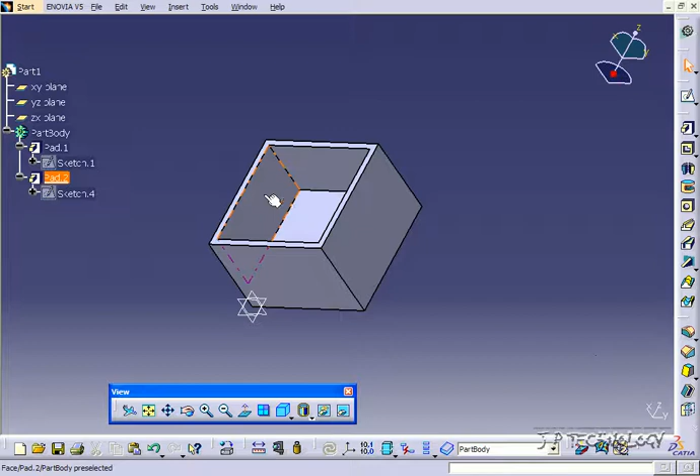To use the stiffener, all you need is one profile, or one open line, and from that you're able to make a stiffener. So what we're going to do is create a line along here and extrude it across. To start off, let's click this face and click Sketch.

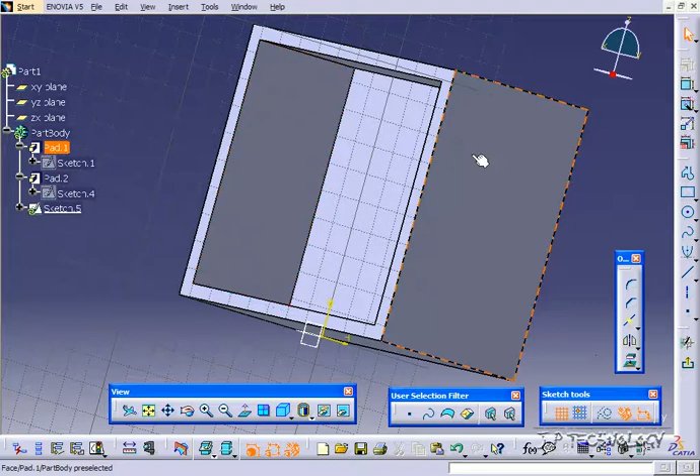Now when you're drawing these lines, there are two different ways to do it. You can go from line to line, touching the points there, or you can do it inside the box without touching any of the lines. This is two different ways of making a stiffener. The first one we're going to make is just draw lines that are inside this box, not touching the edges. So let's rotate it around a bit and draw a little line like that. If you look on the side, you can see it's inside the box.

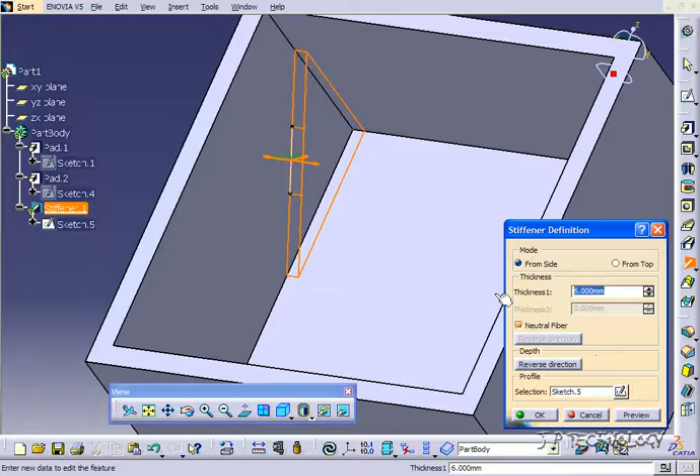Now go back up, click stiffener, and we're going to use the from side mode. You're able to use the from top mode when you click points to points. If we zoom in, with the thickness we're able to slowly bring that sketch out. You'll notice our sketch is only in here, but the stiffener automatically extends it out to the edges and cleans everything up for you. So let's bring this out 20, and click OK. The stiffener comes out 20 millimeters.

Now let's double click on the sketch and move this around. Let's drag this more over to here and see what our result is. You can see that now our stiffener has moved over also. Now let's delete this stiffener.

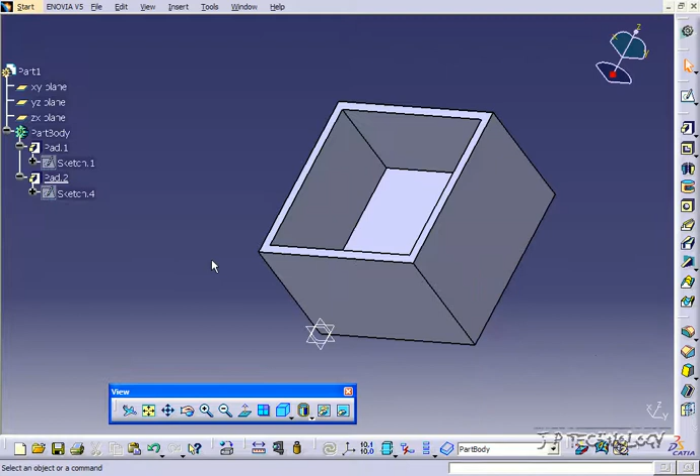We're going to do it the other way that I was talking about. Let's click this face, click Sketch. Now click this face, and we'll project the edges, turn them into construction lines, and now we'll sketch from point to point. So we'll do one from this point along here to a point along there.

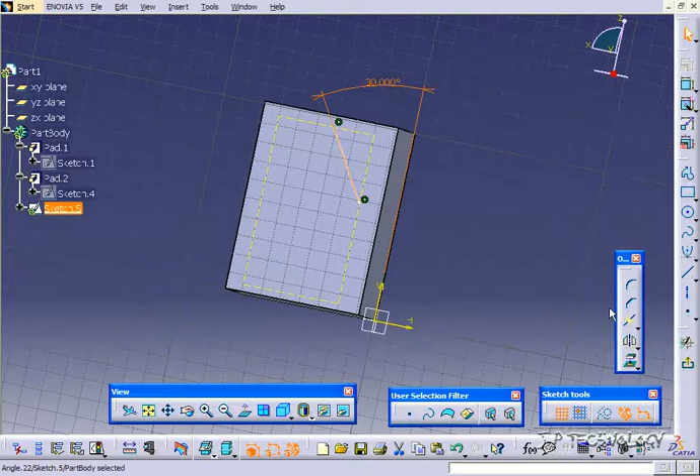Now let's put a little angle in there so we can play with it after. So we have an angle about 30 degrees, let's put in 30, and go back up and click the stiffener.

From this one, you can use the from side or from top. Right now on the from side, we're making exactly the same one we had before. From top, we're going to make one that has a hollow opening in it. So let's click OK.

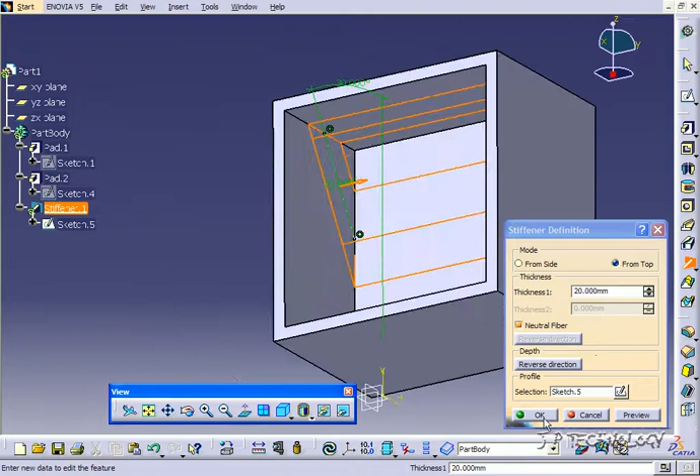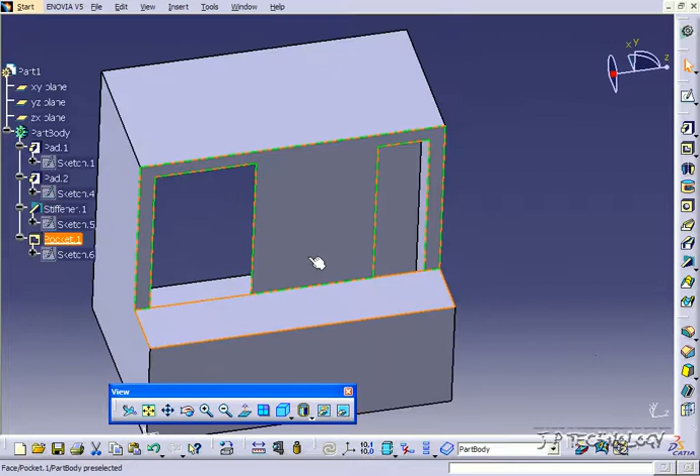Let's click on this surface and sketch out quickly a rectangle to cut this little bit out just so you can see the gap in there. If you look in the back, you have a gap, and that's what using the from top compared to the side gives you. Let's go back.

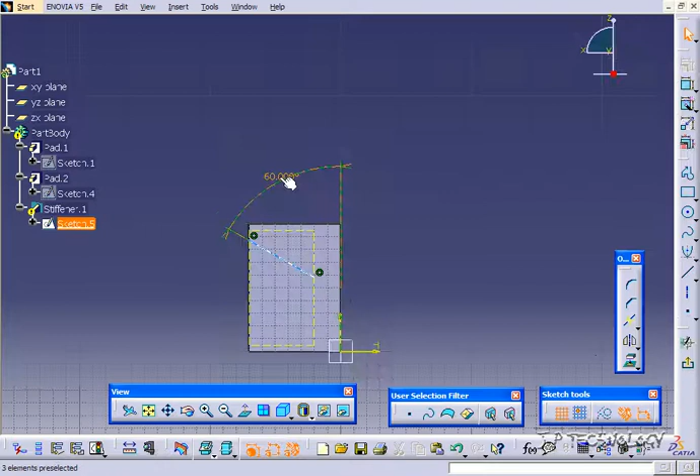Now let's make the stiffener again using point to point, and we'll use from side, just like the other one. We're going to extend it out 25, click OK, and edit the sketch to change the angle to about 60. Because it was outside, it's not going to work, so let's go back and put it to 45, and bring it in. And it should work this time. And it does. So you're able to play around with the stiffener like that.

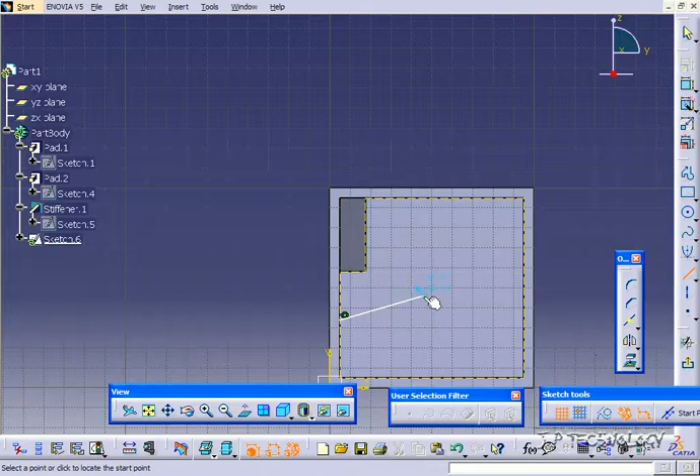Now let's do one that's on the top. Let's click this top surface, click Sketch. Now we'll click this face, project it out, turn it into construction lines, and draw a little jagged line across. We'll go back up and create a stiffener from here.

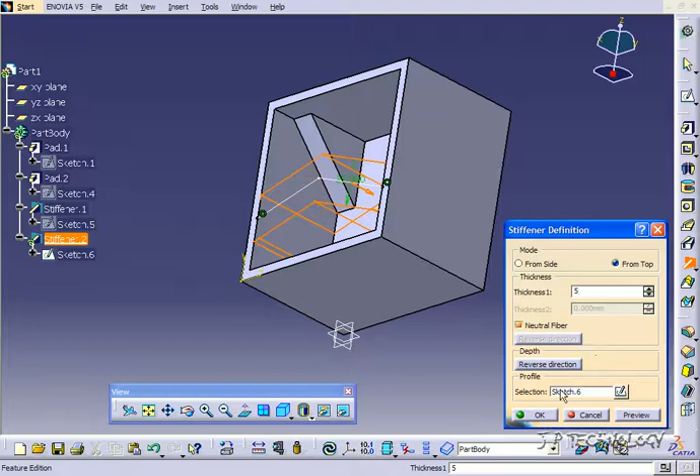Now click OK and click from top. So now we're able to create the stiffener from the top in this mode. Let's bring this down to about 5 millimeters for the thickness. Click OK, and now we've made a stiffener here for about 5 mils.

So what the stiffener does is allow us to use just one sketch line, and you're able to create kind of like a stiffener inside the part that adds ribs and whatnot.

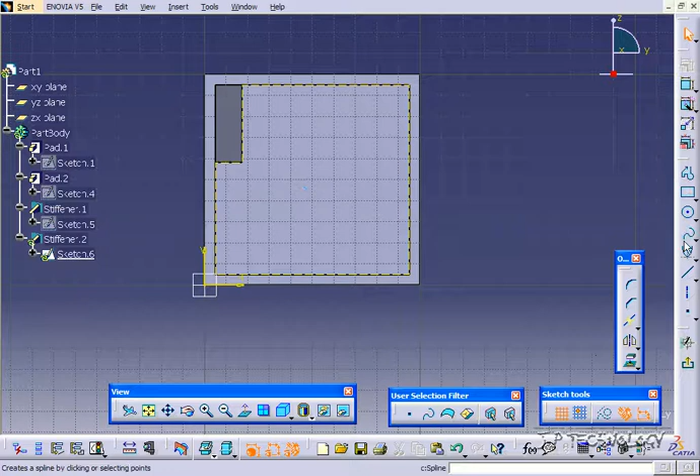Now we're going to make one more from here. Let's double click on the sketch, delete these lines, and try to make an organic one using the spline, with a few curves. We'll go back up and we've created a stiffener with those curves.

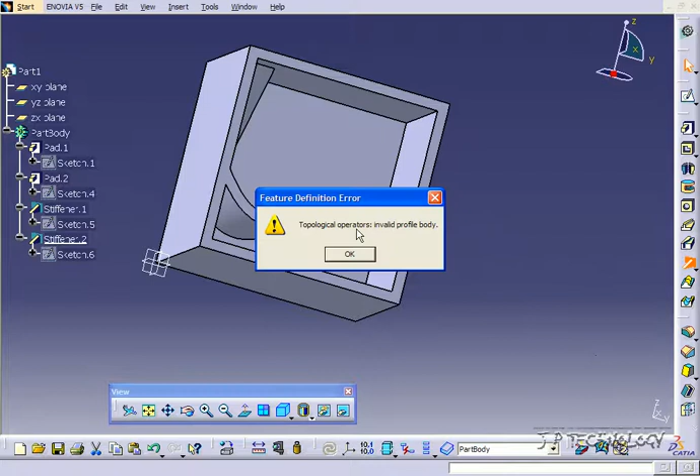So like I was saying, with those lines, all you need is one open line, not a closed profile, and then you have to toggle between from side and from top to get the results you want. By doing this, you're able to create stiffeners inside parts quickly and easily just from a single line.

And that concludes our tutorial on how to use the stiffener feature within Catia V5.